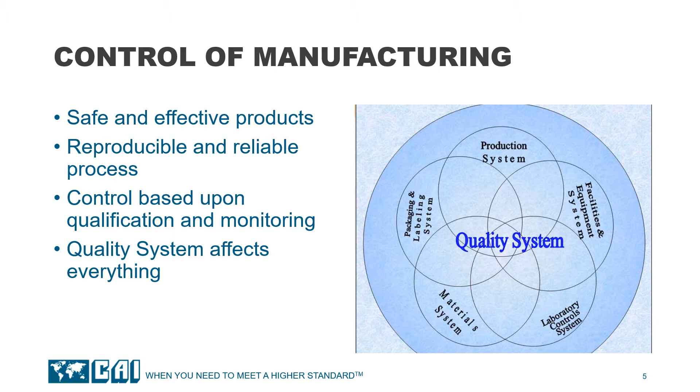Control of manufacturing is based upon verification, qualification, and monitoring. Our goal is safe and effective products, which are created by a reproducible and reliable process. Of course, the quality system affects everything. That's why it's a focus of every audit. So let's talk through why the quality system and quality culture are so critical to the manufacturing environment. Our goal: product quality, compliant operations, low life cycle operation cost, high OEE or overall equipment effectiveness, which is a combination of availability, performance, and quality. And we need to do this all while protecting our employees' health.

So what are the pandemic conditions we're facing right now? We've changed site access. It's limited to essential operations. There may be no visitors. Vendors and suppliers may have limited access. We're focused on manufacturing continuity. So what does that mean for any projects that may have been ongoing? Our supply chain may be fraying. Are we having trouble getting products from certain areas that have effects of the pandemic? And our site personnel are managing stay-at-home restrictions from local governments and working from home.

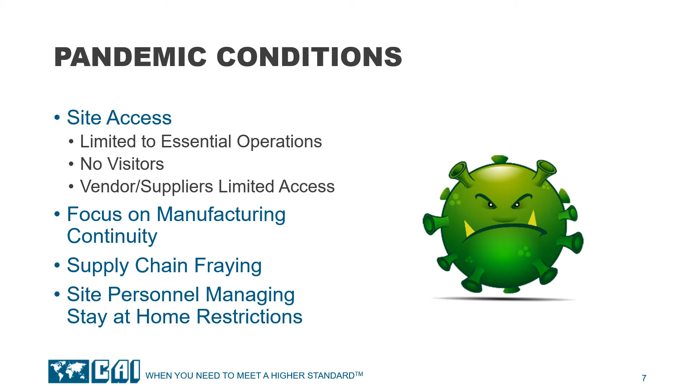So let's dig into the impacts a little bit more. We talked about personnel, but there are limits on interactions. We may have staff shortages, as we discussed, and the limitation on site visits could affect things like outsourced training. How do we get our people trained? How do we onboard the new resources we may need to fill spots that are critical to operations?

What if our vendors cannot deliver materials to our site, or they're unable to drop things off or position things appropriately? Are our raw materials and supply deliveries being interrupted? And what about PPE shortages? We are now competing with consumer markets as well as the increased usage by healthcare professionals.

And we also want to talk about our quality and control systems. Do we have enough people to sample and run the lab operations? Who's doing our periodic reviews? Are they all being delayed? We'll get into some of that a little bit later. And how are we resolving deviations on time when the people needed to do the investigations may be all working remotely and learning new methods of that process? Let's talk through these things a little bit further as we go through the presentation.

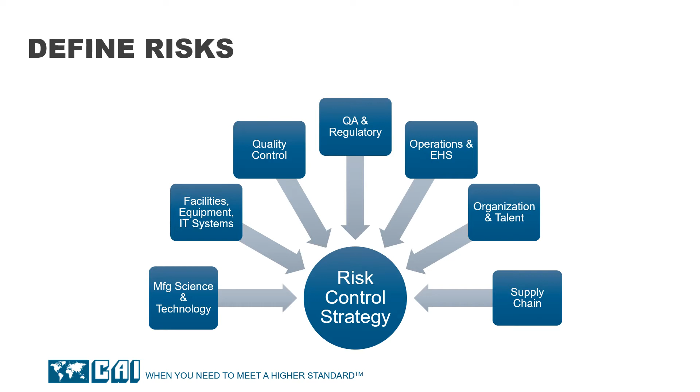So let's move into quality risk management, what a risk control strategy is, and start defining some risks. To prevent issues which detract from your readiness assessment, we'll start by defining these. So the major categories which impact startup and operations are manufacturing science and technology, facilities, equipment, and IT systems, quality control, QA and regulatory, operations and environmental health and safety, organization and talent, and finally your supply chain. All these risks should flow into your overall risk control strategy.

So how do we know what risk we can take? Looking in some broad categories, I'm going to start off by asking some questions, and then we'll hopefully dig into some solutions later. Environmental monitoring. What does our historical data show? Do we know what our high and low risk points are? Water sampling. What are our trends around our sampling points? Do we have that history to review? Do we know the effect of sanitization? Can we change that frequency? In our QC labs, let's look at our technician schedules, and can we do a science-based risk assessment on their activities?

Moving on to maintenance. What are the critical maintenance activities? Let's look at our CMMS data. Are there systems or components that are high risks or have high failure rates? Do we have any predictive data? Things like oil analysis, vibration, other types of predictive maintenance history. Looking at calibration. What does our calibration data show? Have instruments showed regular drift in previous calibration intervals? We can also look back at our process history. If there's comparison instruments, maybe that can give us information.

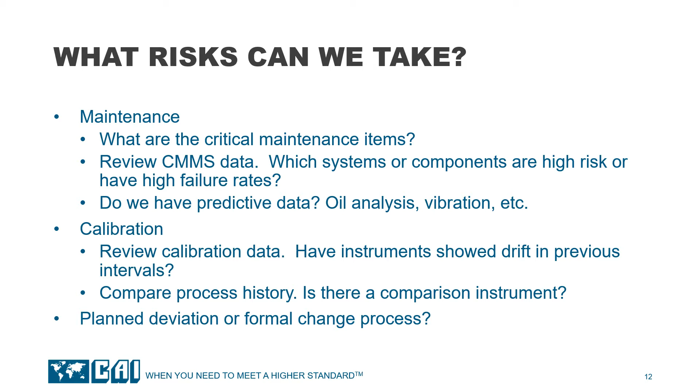And lastly, if we do decide to make changes in our regularly scheduled SOPs or procedures, how do we go about that? Do we have to implement a formal change process? Can we do a planned deviation? What are the quality rules around emergency changes to activities due to external forces like the pandemic?

So the building blocks of quality risk management are change management, understanding our quality metrics, our lifecycle management, statistics, and undergirding all of that is the product and process knowledge. It's all connected. Quality risk management leads into process control. That takes process knowledge, and that's based on statistics. So let's dig into this. The foundation of everything is process knowledge and science. What does it take to make a safe, effective, high quality product which serves the patient and doesn't cause harm? The building blocks in the wall then are quality risk management, change management, and knowledge management.

Let's talk through the development cycle. We establish the quality target product profile, and then this forms the basis of design for development of the product. We need to determine the critical quality attributes, linking quality attributes to clinical safety and efficacy. When we do our process risk assessment, this then starts to link the process parameters and the critical material attributes to those critical quality attributes, and we define our critical process parameters. So design space is optional, but that adds to our process knowledge. It defines the space of acceptable process parameter ranges on a multivariate level.

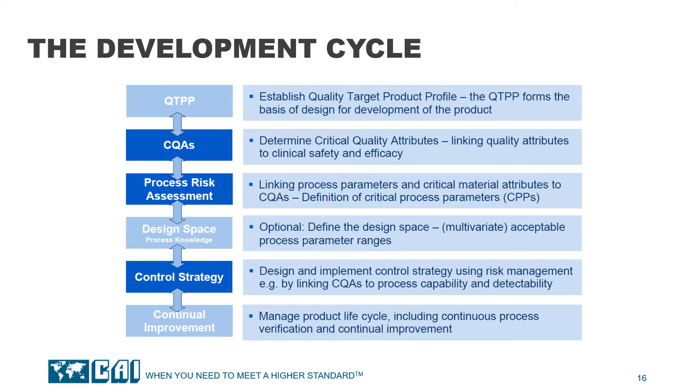Then you move into your control strategy. You design and implement your control strategy using risk management by linking your critical quality attributes to your process capability and detectability of risks. And finally, you build in continuous improvement. As I mentioned before, you use your gain in process knowledge to improve your design space, improve your control strategy, and make your process more efficient and effective. Improving the process operations using continuous process verification and continual improvement to manage that product life cycle and hopefully reduce your cost of goods while at the same time improving quality.

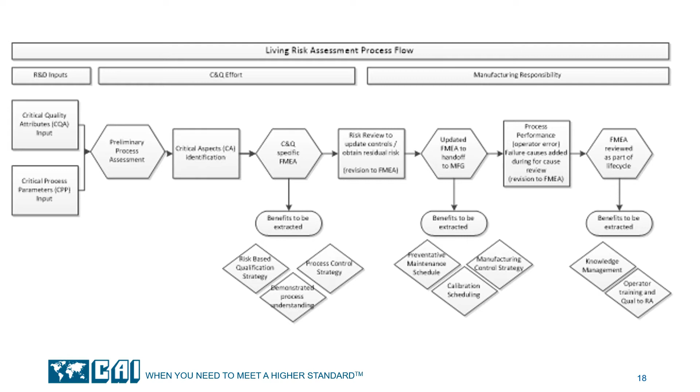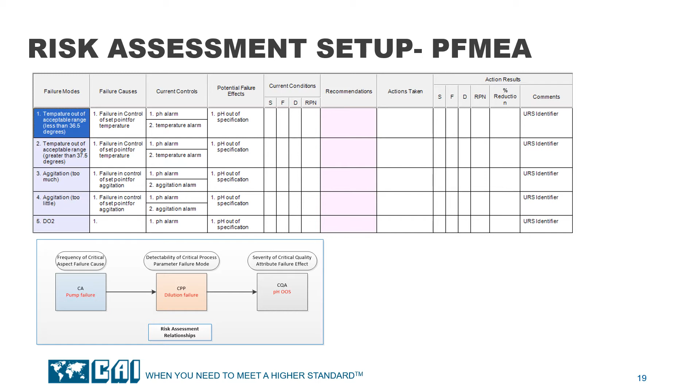So how does this all apply? How's it connected? You start off with a project which builds a facility. You add a staff and a process to that facility, and you have a quality group that provides the oversight necessary to ensure quality, effective product goes out the door to the patients. And this stretches from development through commercialization and then into full-scale operations.

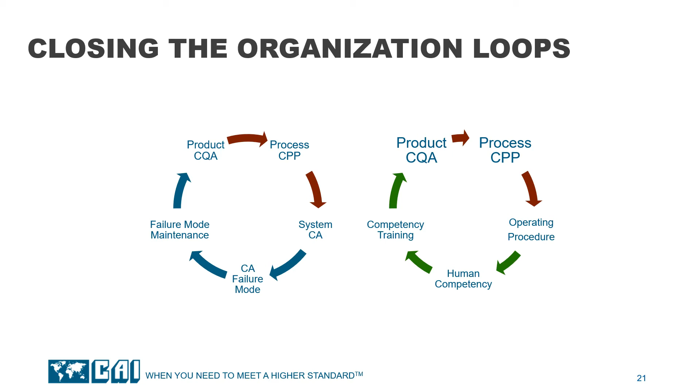So we talked earlier about the inputs to a risk control strategy. Our manufacturing science and technology group, facilities, equipment and IT systems, quality control, quality assurance and regulatory, operations and environmental health and safety, our organization and talent, and the supply chain.

When you link these risks with the three different types of controls, technical, procedural, and behavioral, the technical controls construct barriers to introduction of risks. We talked about some of these already, but these include system access controls, equipment interlocks and permissives, etc. Procedural controls are written standards that set the rules and guidance for behaviors, but they're not behavioral controls.

Behavioral controls work to set the conditions for humans to perform predictably. This means performing with fewer errors and less temptation to violate procedures. When behavior is a problem, technical and procedural controls may help make someone pause before proceeding in the wrong direction, but if someone's mind is made up, these other controls may not be sufficient. Often the scoreboard goal is one of the most impactful tools to inspire predictable behaviors.

Other behavioral controls will include strong supervisory skills, role clarity, transparency and communication, and a cadence of communication and a structured, engaging, inclusive, continuous improvement program. These all act as risk controls to inspire predictable behaviors. It's critical to understand how the workplace inspires or detracts from high performance behaviors.

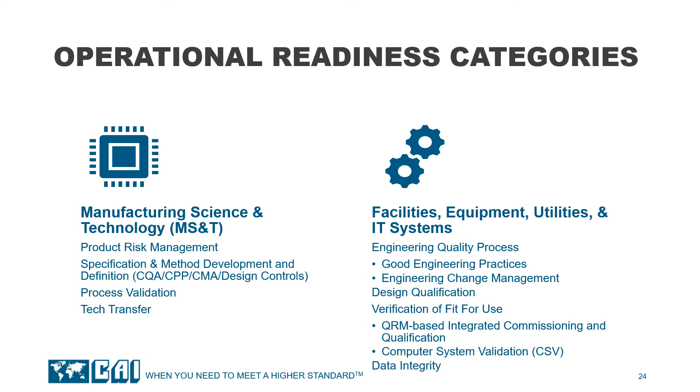You want your documentation system to support your goals. So, are you working toward your goal, or are you working for your documentation system? Many documentation and document control systems are over-documented, and they don't necessarily have to be. As human beings, we tend to complicate everything. Remember, you're writing for a user and an operator. So write with your audience in mind and implement and plan your regulatory strategy and your quality management system together.

Focus on risk and trends from a deviation perspective, instead of minor issues that do not affect product safety and efficacy, but can absorb large amounts of your QA and regulatory staff's time.

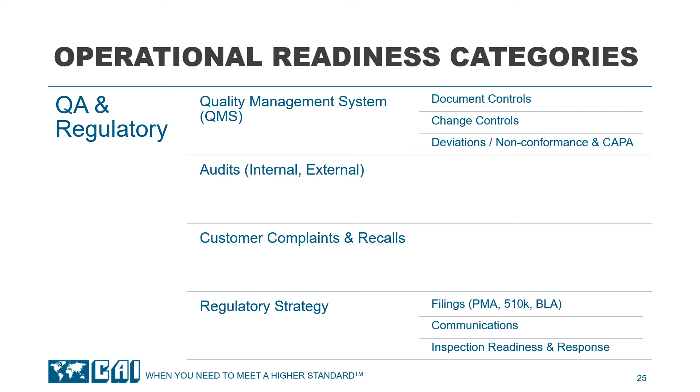Regulations require reserve samples to be maintained for many years, often past the expiration date of the drug product or its active ingredients. Samples should be kept at the site where testing is performed. Sample size should be 2x that required to perform all testing. So labeling and storage conditions can often be a major issue as you progress through your manufacturing life cycle. Your stability program must meet prescribed storage conditions and scheduled testing. Again, how do you manage that over the long term?

And if you look at your regulatory citations of deficiencies, such as 483s or warning letters, many of these come from data integrity. How is data transformed, transferred, stored, accessed and secured? So your computer system validation and instrument qualification become critical, as those areas directly affect the quality and integrity of your data.

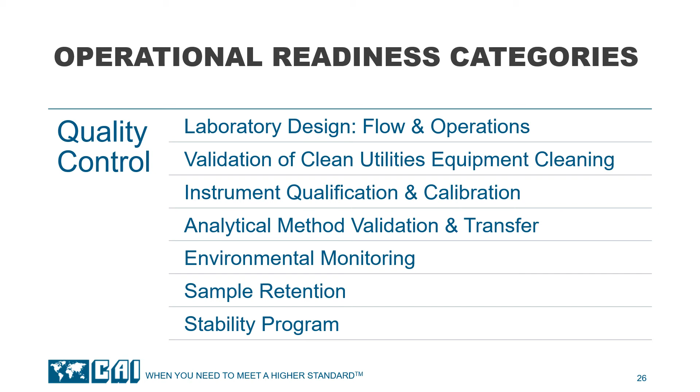In operations, again, documentation is critical. Our batch records, how do we design and review those? Our SOPs, are we writing them? Are they usable? Are people following them? How do we coordinate and schedule our activities, batches, cleaning, changeover?

EH&S, our permits, our waste management system, and our safety program. And then if you look at supply chain, our supplier quality, receipt inspection and testing, and the warehouse and shipping controls. What's the most common FDA observation? Not following SOPs. If it's not well written and usable, people will fail to adhere. If someone performs or verifies work who is not qualified, you're likely out of compliance.

So coordination and scheduling can be a major issue in being operationally ready, having the right people in place at the right time to perform things that they're qualified to perform. Ensuring your suppliers can meet requirements, including your QMS, verifying quality agreements are in place to call out these requirements. Too often, supplier audits show that requirements were not originally set up for the suppliers, and then you're scrambling to build those quality agreements, service level agreements after you've gotten a citation.

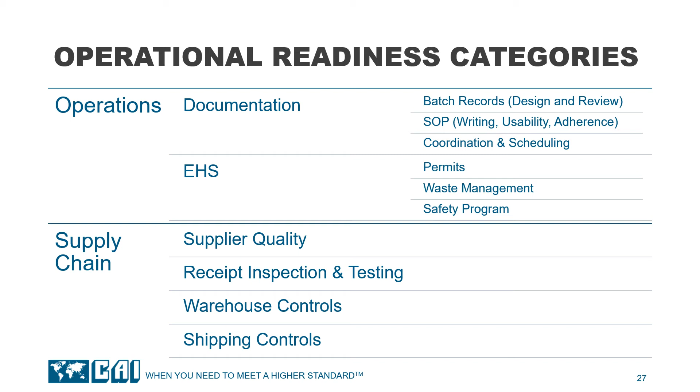Let's take this back to the pandemic response. What modifications can we make for environmental monitoring? Based on our data, can we extend our sampling times? What do the subject matter experts say? What does the data say? Every time we sample, are we close to violating our limits, or are we safely in our control area? Perhaps there's just points that we can reduce or eliminate temporarily while we're staff limited.

Water sampling. Can we shift to automation, such as using online TOC and conductivity measurements instead of operator sampling or manual interactions? Again, what does our data say about the frequency? When we sample our water systems, are we against our control limits? Are we safely in control? And can we do things like increasing sanitization frequency using the automation to temporarily reduce our frequency? How do we document that? What do our subject matter experts say?

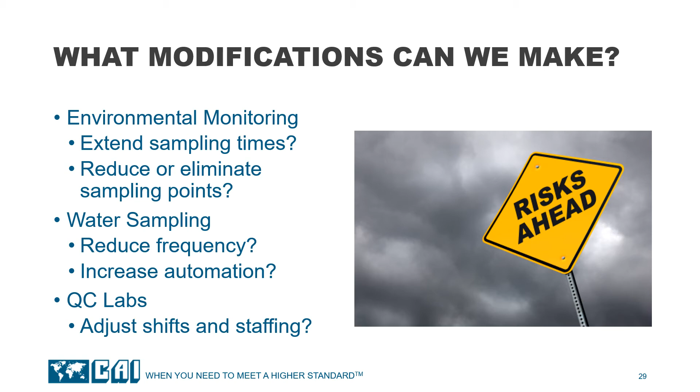In our QC labs, how do we adjust our shifts, staffing, and supervisory oversight to make sure that our samples are being handled effectively? We have the right qualified staff when we need them, but yet are practicing our appropriate distancing and personnel protection requirements to take care of our people.

Moving to maintenance, how do we reduce and eliminate shutdowns? Are there maintenance activities which we can defer? Can we reassign some of these activities, such as lubrication or regular inspections, to the operators who are running the equipment every day? Is there a way we can train them quickly to pick up these activities?

Calibration. Can we extend our calibration interval by 3 months or 6 months? Are all our current calibrations necessary? These are areas where risk assessments and analysis of our calibration history come into play, and we can rely on our subject matter experts, our process history, and our data to potentially extend these intervals, reduce interactions with the plant, and reduce the exposure of our operations to maintenance technicians and cross-contamination while we're distancing.

And then quality activities, revalidations, and annual reviews. Can these be done remotely? Do they need to be done every year? Perhaps we can reassess our quality activities and push revalidations for certain systems to a 3 or 5 year periodicity instead of an annual review if necessary. So many of these items, if you're changing them, may require a planned deviation and certainly will require strong coordination with your quality group.

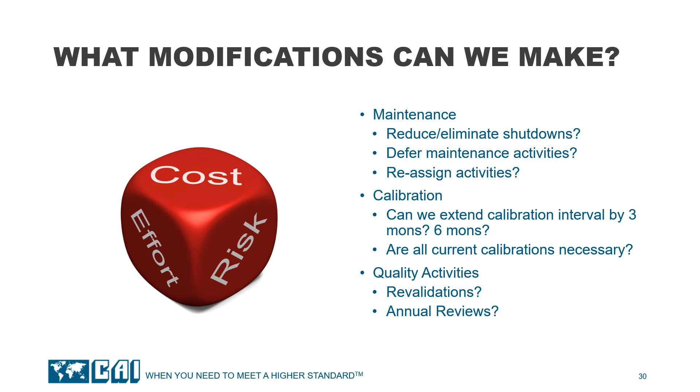When you're looking at your calibration data, have you had instrument drift? Is there process history you can compare to and see if your instruments are really drifting or if you're just calibrating them and there's very little drift that's occurring? So let's go into maintenance and shutdowns a little deeper.

Okay, you've missed maintenance. Now what? Well, let's review our history. Has this maintenance been missed before and what happened? Let's review the trend data. Perform a PFMEA or fishbone analysis. What are the potential failures and outcomes of this maintenance miss?

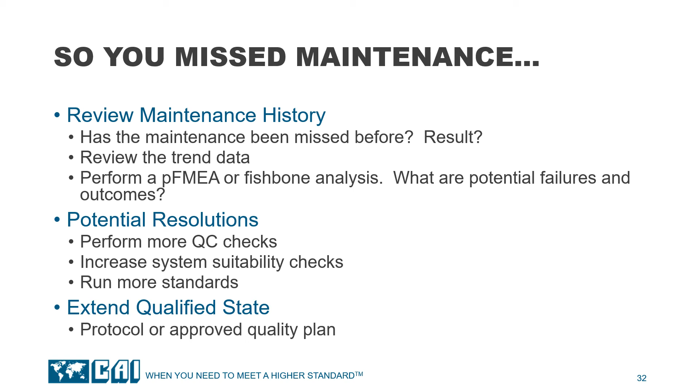Perhaps we need to run some more QC checks. We might need to increase system suitability checks. Maybe we need to run more standards. And how do we extend that qualified state? Do we need an approved quality plan, or is there some type of protocol we need to write? What do we do?

So, you have a shutdown coming up. You haven't made enough product, or you're very worried about bringing those large numbers of people necessary to execute the shutdown effectively into your plant at a time like this. So, is it urgent? Do we need it?

Just to cover some of our typical shutdown activities, we have routine elastomer replacements, mechanical seal replacements, heat exchanger pressure tests, routine derouging or passivation. You're doing your air handler maintenance, pre-filters and belts, and your clean room and HEPA testing. So first, let's look at where our failures come from. Often, infant failures, along with end-of-life failures, are the primary cause of random failures.

Let's look at some failure profiles to think about the impact of shutdowns and scheduled maintenance versus predicted maintenance on our equipment. As you can see, high numbers of random failures occur with no evidence of wear out at the beginning of life. These so-called infant failures are not predictable and may be caused just by replacing equipment. In addition, unnecessary calibrations, wiring checks, and things like that that break circuits often can introduce faults that were not there before.

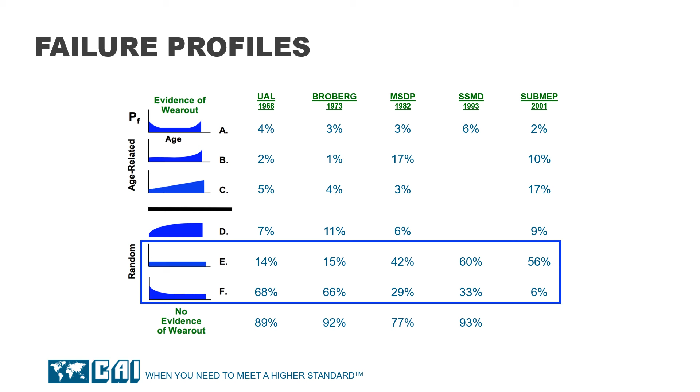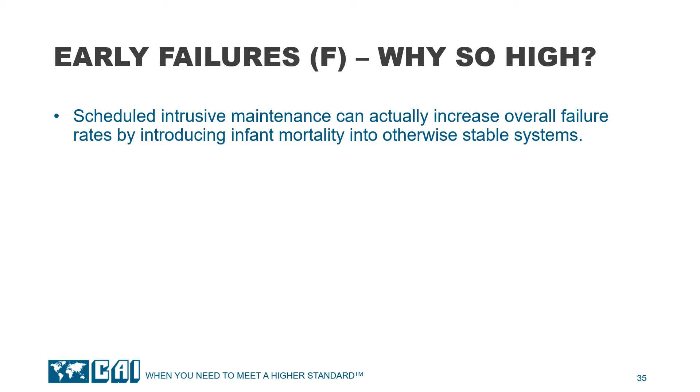So there can be some unintended negatives from doing shutdowns on a regular schedule instead of based on equipment predictive data. Let's look at that further. Early failures, why are they so high? As I said, scheduled intrusive maintenance can actually increase overall failure rates by introducing infant mortality into otherwise stable systems.

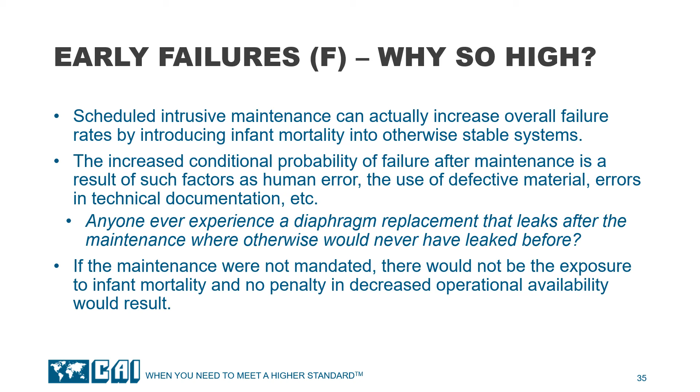This increased conditional probability of failure after maintenance is a result of such factors as human error, use of defective material, errors in technical documentation, etc. An example is replacing a diaphragm and it starts leaking but wasn't leaking before you touched it. If maintenance were not mandated, there would not be the exposure to infant mortality, and no penalty in decreased operational availability would result. So what can we do instead?

Perhaps up to 40% of all preventive maintenance tasks originate from diaphragm valve maintenance. So we could rely more on condition-based maintenance and reconsider the risk of elastomer replacements.

For testing HEPA filters in clean rooms, evaluate the practices using the December 2015 update to ISO 14644-2, and reconsider the risk based on the newest revision to the specifications for testing and monitoring to prove continued compliance. You can utilize already scheduled or unplanned downtime for routine PM tasks which can't be deferred, and analyze each system on an individual basis.

Don't automatically assume that you have to have a shutdown every 6 months and then look for activities to put into it. Can you remove calibration of non-critical instruments? Go to trace metals for derouging. Elastomers are a great activity for available downtime. And there should be multiple ways that you're looking at how maintenance gets done, not just shutdowns.

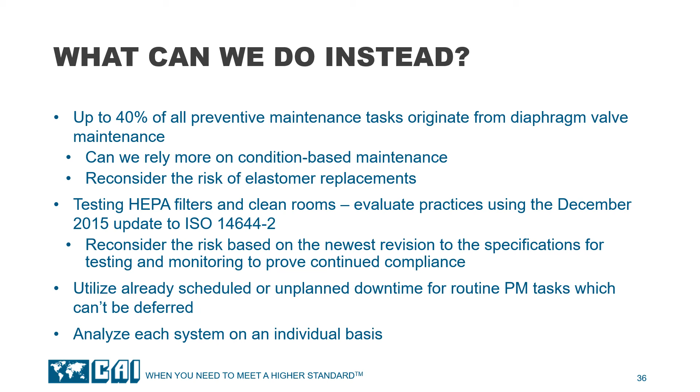So let's move to a discussion of our people, specifically training and leadership. How is it often done? The common approach is that while the capital project is underway, we hire some smart people, begin developing the process and writing batch records and SOPs, simultaneously racing through change controls and staff training toward some arbitrary deadline, either PPQ, inspection, or something like that.

Throughout your readiness effort, the two-way communication is critical. No one knows the risks and problems better than those who are trying to overcome them. So use your communication cadence to gather data and look for trends that point to larger risks in the workplace. A major risk is a lack of clarity of purpose and role. This shows up in the form of either constant firefighting or dropped tasks. Problems in this area usually stem from a lack of alignment within leadership or a chaotic organizational structure leading to a lack of role clarity.

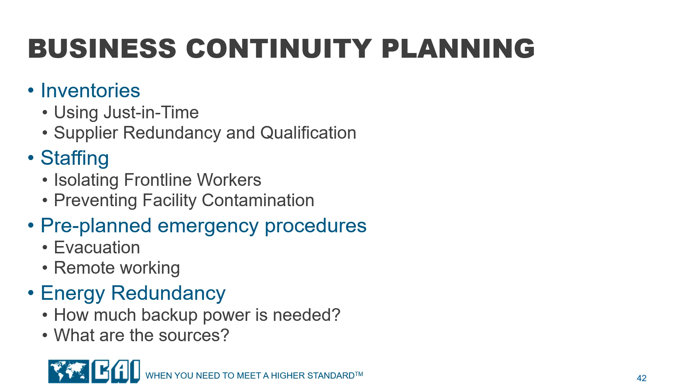As an example, what are your energy sources? Steam, electricity, fuel, etc. What's your desired operational window? Do you have enough diesel to make a batch or complete a batch that's in operation? Do you need redundant substations, as in multiple electrical feeds? And what's the intersection of all these? What's your limiting variable? Staffing, energy, raw materials. Making sure all these things are put into your business continuity plan will help you survive the next situation in the manner that you have planned.

There's excellent guidance out there for industry, as we mentioned earlier, ASTM E2500. The ISPE baseline guides and good practice guides include GAMP and the GAMP good practice guides, a suite of good practice guides for various technologies, and finally, this suite of baseline guides created with input from regulatory agencies. PDA has an extensive set of technical reports which provide in-depth information about a variety of technical challenges and process implementation.

So let's sum it all up. This is the time to change from the way we've always done it and implement efficiencies based on product and process knowledge using a quality risk management approach and strong business continuity planning. Plan for your next event, leverage industry guidance, use your stakeholders and SMEs knowledge, and make sure that you're implementing engineering and science-based rationales.